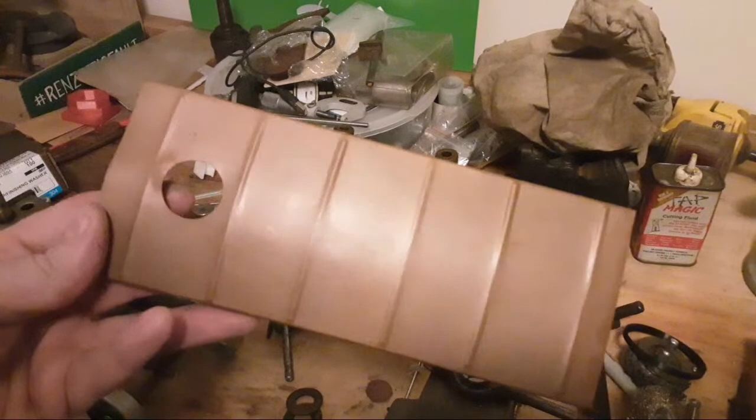But there's my canopy. These spiral pieces come off.

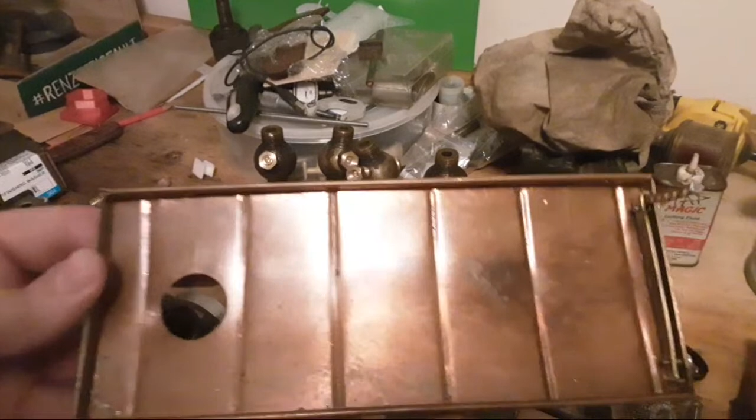It was actually, I quite enjoyed this. I think it come up all right.

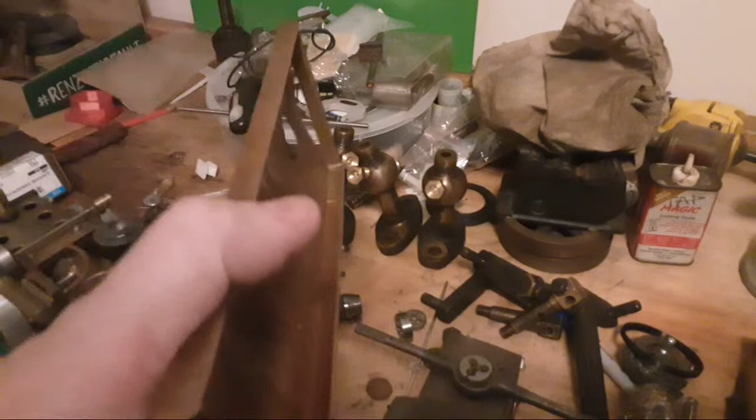I've just got to solder these back on here. It's got little pivoting bushes, and these are supposed to go in there, and they were soldered in pretty substantially, but they've come out. So whether I make new ones of these and new bushes and silver solder them together so it doesn't happen again, or what I do, I don't know.

It's got proper spiral columns, see? But it had a bang and they're a bit bent. But anyway, that's one of those jobs that I've got to do - get to that one day when I've got spare time.

It's something that's well proportioned. It's a pretty tidy little engine. It runs nice, straight out of the box.

It's got a burner. But without a whole lot of effort, you end up with a bit of time and a lot of new skills. You end up with a pretty nice little engine, properly finished.

Some small precision drills that were obviously odd sizes, probably for gas jets, something Dad had, I reckon. Don't know what's there.

Anyway, I'll put them away.

Dan's just been on the phone about the traction engine. Don't do that - I was going to ring, but then my audio book sounded better and I was dog tired and grumpy when I left work, so I didn't ring Dan.

I'm sure the information will wait. There's plenty of them around if you want one.

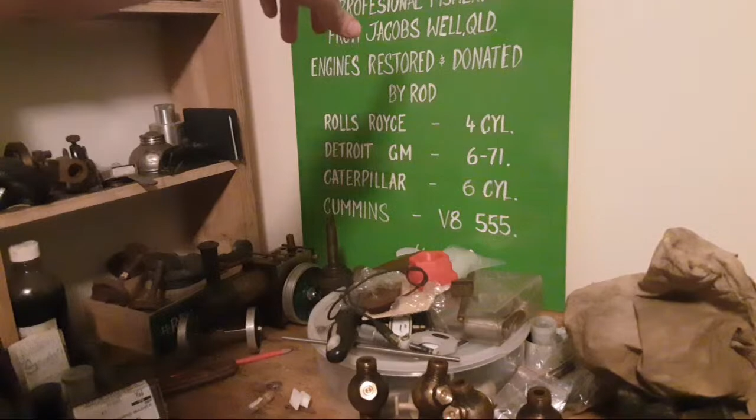I overshot the top of the E here. When you point them out, it's really not terrible, but there's a couple of things that aren't quite right. I've put the angle on that M there wrong.

And I'm gonna probably go over it all again anyway because it's a bit thin, so we'll probably fix most of that. Anyway, job's done. It's another job.

What I am buying is a drum of WD-40 or diesel or something and a squirty bottle, because I think that might be the way forward, apparently. No engines for me, I've got this nightmare. It's enough engines for me in my lifetime.

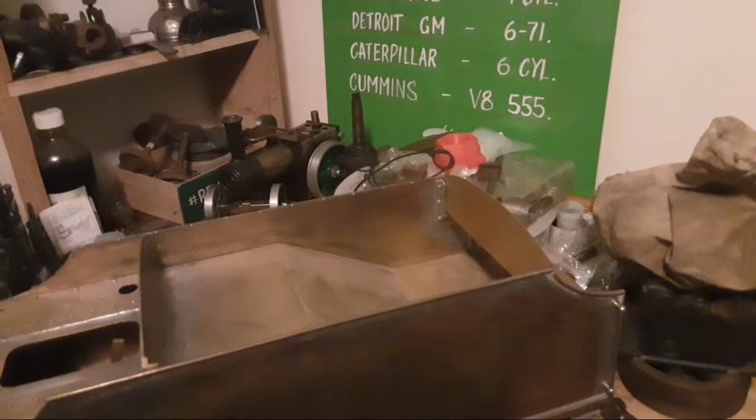I don't know how much you can actually see here. We'll try, we'll attempt. Here, I'm going to go hands-free.

But give you some idea, we were talking about this - this is for Don's Step-by-Step Metalwork 3, Ross, that's exactly right, and it builds that little engine over there in the corner.

David is the number one authority on that particular engine. But that's a pretty tidy little engine.

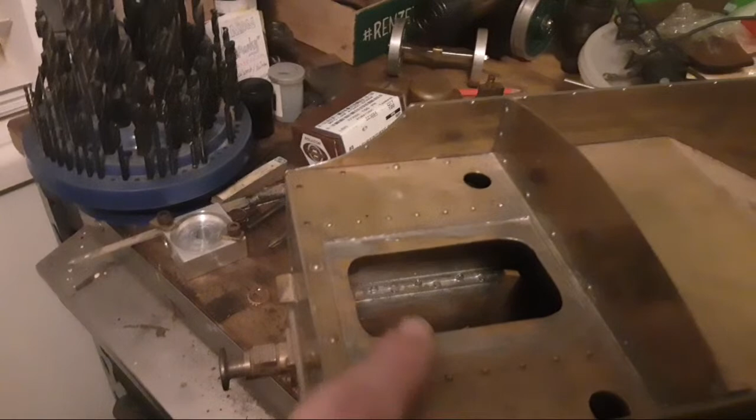So what we did was put angle all the way around - you can see that probably. We need a torch. Like that, all the way around. And then all the way around here too.

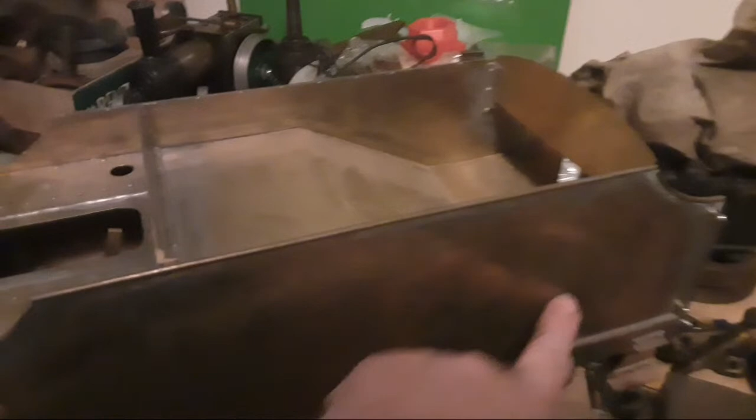These are actually rivets, I think - this was actually riveted on here. But this has got screws all the way around here too, and there's angle actually on here, follows this pattern, this shape here, to hold it together, and then there's an edge around here, which was a fun job. That's actually riveted on too, it's got rivets in the back, but a bit of work. This is just screwed in here. So that's the best way to construct a tender.

We'll have a bit of a look underneath and see what's involved. The tender's from my 3.5 inch gauge Princess Marina, which is another project that should have been finished and never has been.

Capillary action on the solder, yeah, just a soft brush and a big soldering iron and plenty of 50-50 or 60-40 or something. Ross, get in touch with me about that.

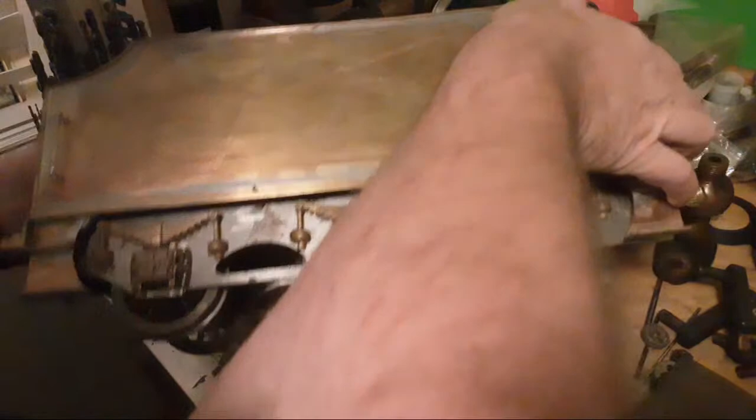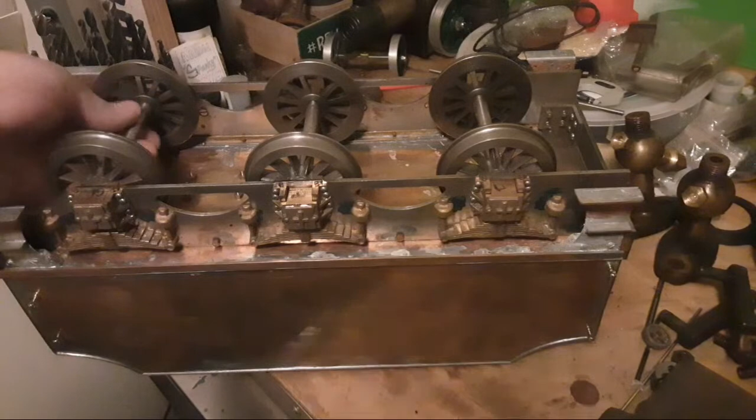So, I'll give you some idea what's involved with this. We've got very weak springs in it that need stronger springs actually.

Don't know what's happened here. Something got pinched or caught or something. There we go. There's a sort of spring loaded thing. Something's not quite right there. I think it's a spring caught on both of those.

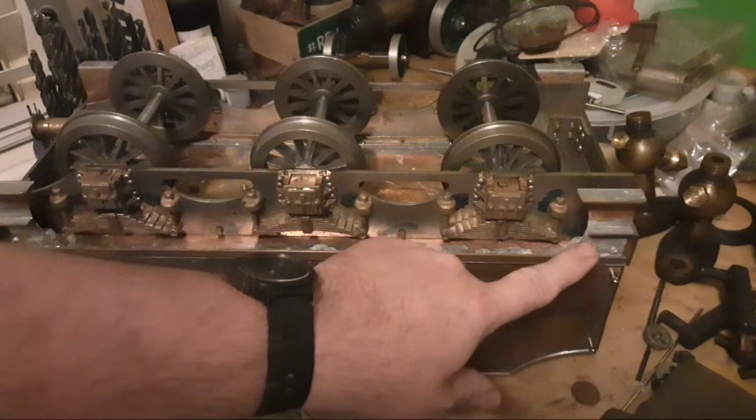This was actually a bad idea, putting these steps on here like this, and I'm probably going to cut them off and redo them and put them actually on the horn plates. But these were laser cut with all the shapes in them, and then these castings here go on there, and then the axle boxes and the two little horn stays each side.

So basically the wheels are just pressed on the axle. Quartering anything's not important. They're just castings on here. They've got coil springs in here, the springs. Hey, Kevin. And then the buffers are all.

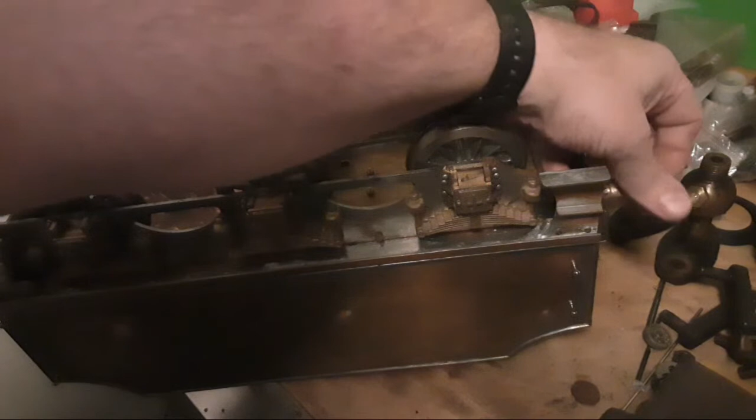It's a big job, this, but the buffers are all sprung as well. I don't think these have actually been properly assembled yet. I don't think these were strong enough springs either.

So there's a lot of work in that. I don't know why this has gotten tight, but I think this one's not. This one is. I think the springs probably jumped out of the keeper there because they weren't the right springs.

Might be a little bit of rust there, but I don't think so. Probably it needs some oil. That's about the long and the short of it.

This is the same. It's got two steel, like two aluminium, two angle rails here to hold this on there. So these are screwed or bolted through from here in a couple of 4 places.

Then here on the back, or on the front here, they've got pieces of angle here, and this fits in between them, and they've just got bolts in them. These are actually riveted on the front. And then there's bolts for the buffers.

So crap load of work in that, but you can put something like this together, if you get in and have a go. This took me about 4 months, I think, 3-4 months weekends.

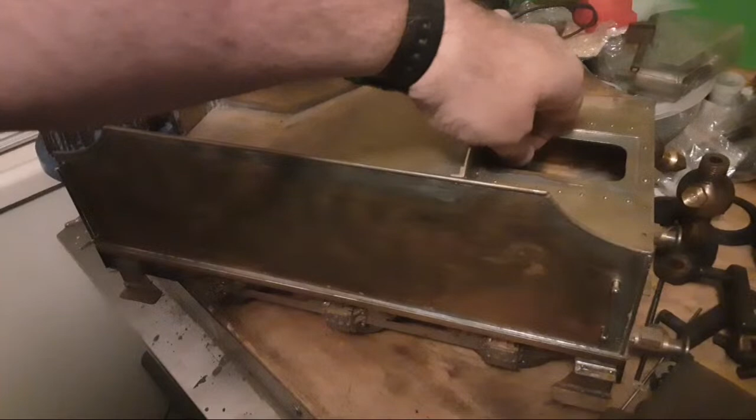There's a hand pump in here, a stainless plunger and everything. And I need to put a hinge on this, but that's basically a cover for that.

Kevin, g'day. We really are looking forward to your next video. Absolutely. If you're anything like me, you've got nothing else to do.

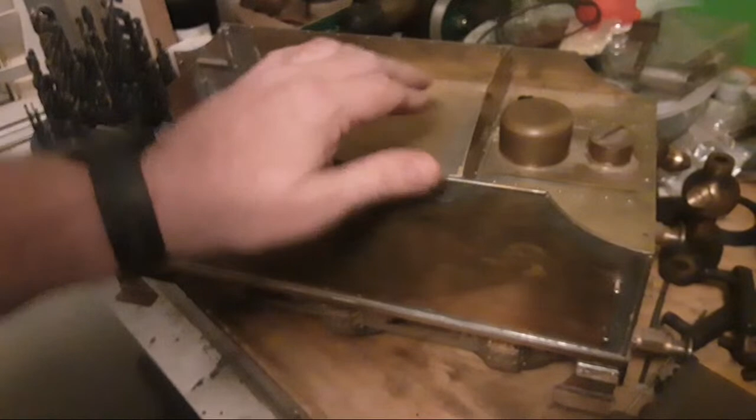So, anyway, this is something that I'm still working on, which is sort of a dummy panel for display. I'm not sure it's entirely as awesome as I anticipated. I might have to rethink it.

But the idea is to have a dummy panel here and working doors and a toolbox and stuff on it, so that you can put it on for display or you can take it off to use it.

The boiler is what needs to be done, but the boiler is the expensive bit, so at some point maybe, when I sell the roller, or not.

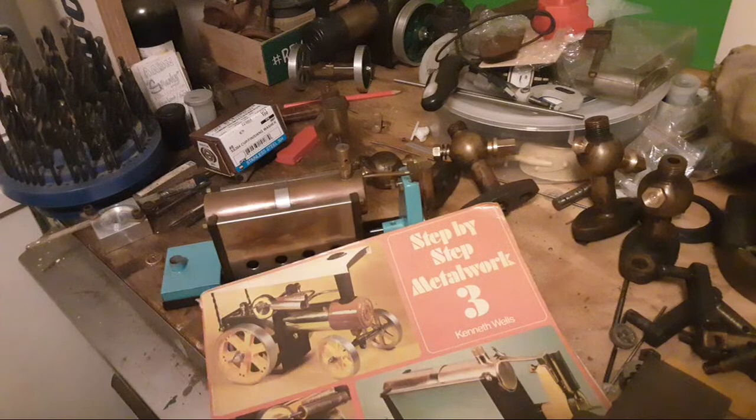Anyway, this is a pretty nice little book. It's still in print, or back in print. There was 3 of these books, this is the last one. It's a high school book. We had this in high school, and I never built either of these engines. I looked at the book and wished I had.

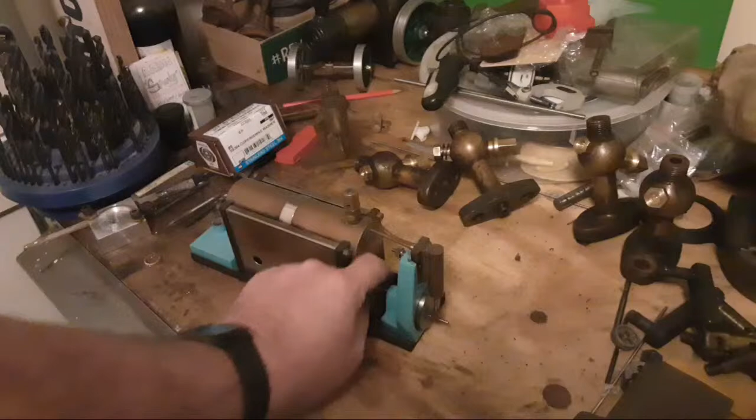But I built both these, right? This is the marine engine, which is a very pretty little engine and quite good. It's got a burner in the back and a little oscillating engine with a casting and everything, proper form sideboards with nice flange holes and folded up sheet metal and studs through here with nuts on each end and a piece of stainless across the top to hold the boiler in place, and proper pipe work, very presentable, like oil hole and a stripe on the flywheel. Very, very cool little engine.

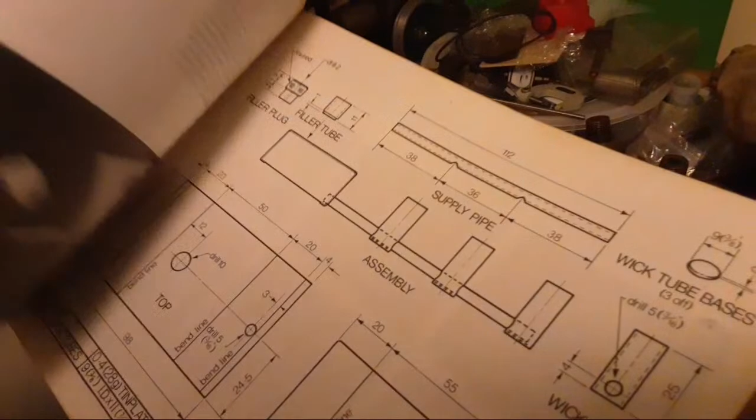This is a good book because it's basically step by step. It's got good drawings in metric and imperial - actually, mostly metric, sorry guys. It's got a picture of the burner and the base, that's it there, see? It's not a bad little engine.

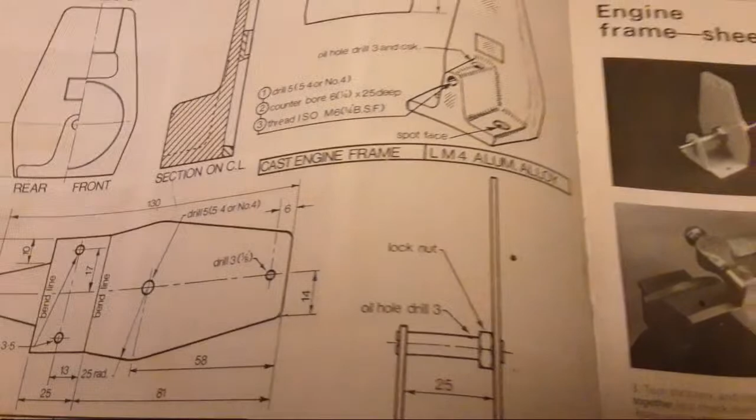The engine assembly is the same on both engines, and the boiler's pretty much basically the same too, but it's got options, like David says. So there's a casting, which I made a pattern for, and there's a sheet metal one, which is made up out of sheet with a bush in it, which is quite good too - so you don't need a casting for it. So that's made without a casting, but this one has got a casting, which I did.

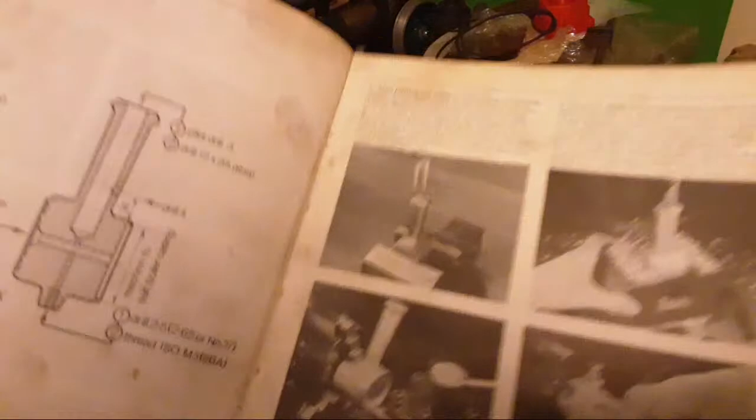Having said that, it's got basic foundry work too, step-by-step drawings, copes and drags, how to pour your castings and patterns, and make patterns and castings for this little traction engine, which is a very pretty little engine. It's quite a good runner. So basically it's wooden patterns through to completed engine.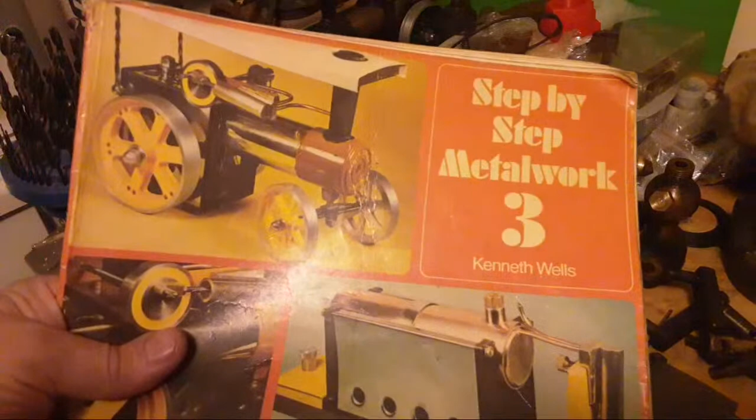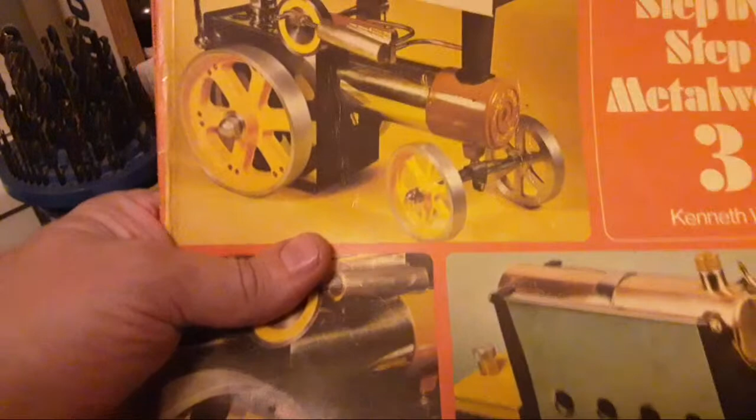Donald, yeah, do it because it's a really nice little engine. I've got a set of patterns, Donald. You're down the road, so I can get you a set of castings. No worries at all, but that is a pretty good start.

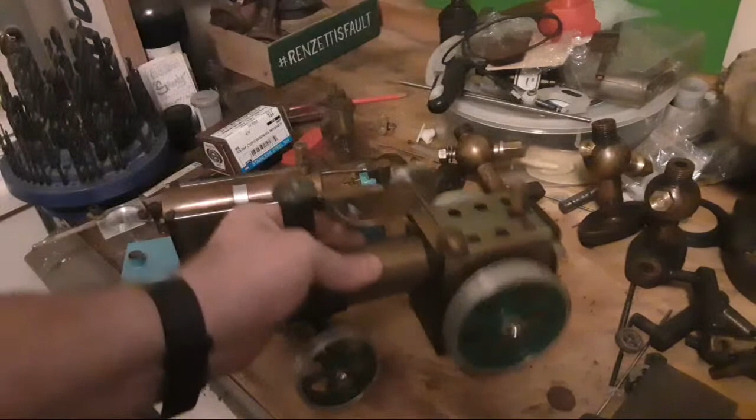It's a nice little engine. This runs like a dream. It's well finished - better finished than a Mamod or a Wilesco engine. It really is classic. And the traction engine's really not a terrible design either. It's seen a bit of use, you can see they could do with a polish, but this is a really good design.

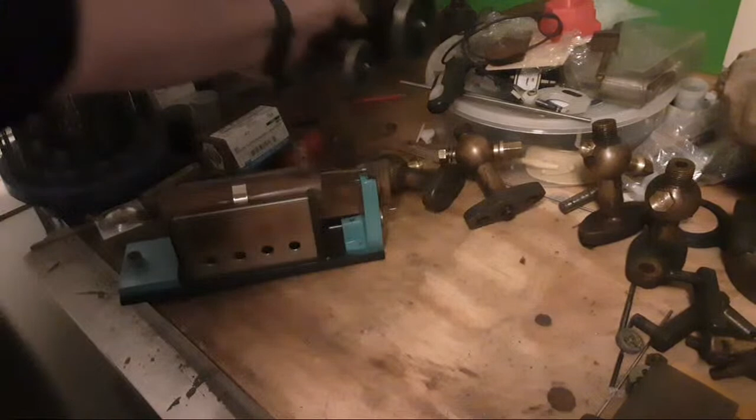The boys over on the Discord forum are building a poly. I'll grab that book too.

Also, there's no washer on that one. Someone said something about removing water from brass copper boilers, that's why. There was some discussion on Discord, on my Discord server, about steel boilers being a bit more difficult to manage and maintain. But you can't really leave water in or dampness in a copper boiler either, because this is what you get, and you end up with scale. But that's beside the point.

These are Titch, like LBSC pattern safety valves from the Titch book, which is a proper Ross Pop style pop ball safety valve, which is fantastic. Probably could come apart in the clean too, but anyway, you could go in ultrasonic maybe.

Steel and copper boilers are really the same maintenance. You've still got to spend some time on it. But a steel boiler in another 30 years is going to be a lot easier to put new tubes in than a copper one.

But someone said they thought a boiler only lasted 30 years. That's not quite right. The boiler on the roller was rebuilt in '97, so was this 25, 28 years ago or something? It's still got a full boiler's ticket, and I think there's still at least that long or a bit longer on it before it needs to be downgraded.

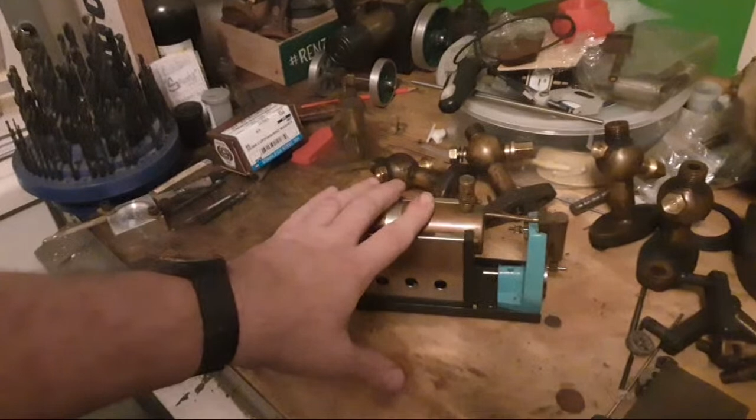But if you've got that crap in there and you put hot water in it and boil this off, right, all that crap's going to boil off. And then you get non-dissolvable solids in your water. And what you get is air bubbles when the pressure comes up and the oxygen rises to the surface of the water.

Where with a clean boiler and clean water, the bubbles come to the top and then they pop. So you've got a very small or fairly thin foam layer, like a kettle boiling or something like that.

Take care. Say hello to the ferret.

So what you get with a dirty kettle, you don't get the same result. What happens is when that boils up, the bubbles in the foam at the top, when the oxygen comes up through, because there's a layer of non-dissolvable solids on top, those bubbles don't pop.

You just get more and more foam. So what you end up with is a much more difficult to determine water level on a gauge glass, and you get less steam space at the top. So when you do open the throttle, it takes a lot less to withdraw the steam completely, so your pressure doesn't last as long.

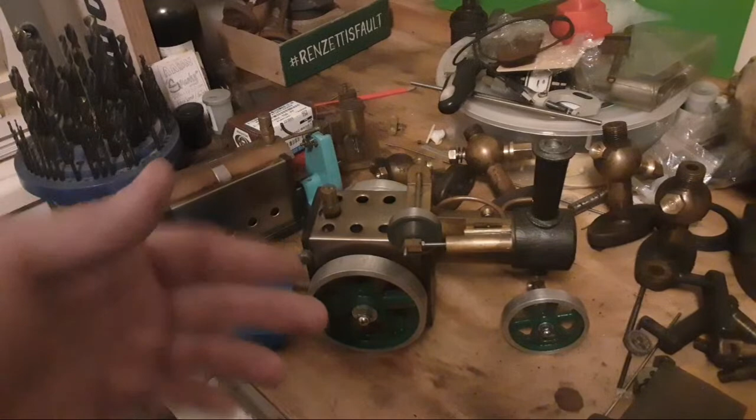Anyway, there we go. There's boiler school for the night.

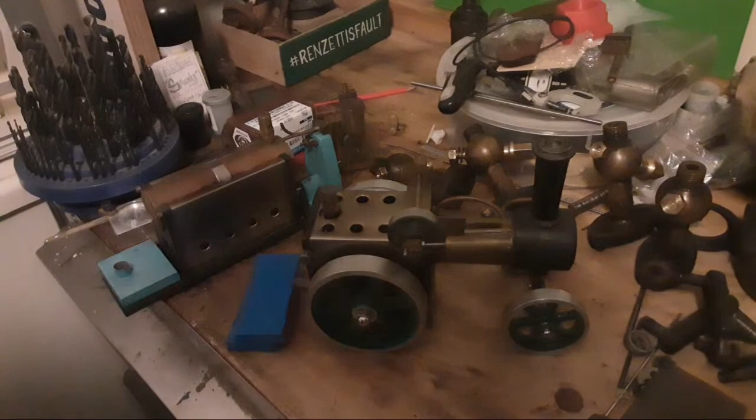I know lots more than that, but I'd have to look it up. Ask Dan, just Dan Shed on if you're on Discord, on the Discord server. Dan Shed, just tag him, he'll answer your questions. He's an expert, it's what he does for a living. I'm not. But I guess I can drive a roller around a bit, that's about all I know, and that's very, very limited. And I've sat the course on all this, but I've retained some of it.

So that's how it works.

But there's more to driving a traction engine than just driving it. The other thing about a full-size traction engine is that they don't have brakes. Which is a bit of an issue.

We could demonstrate with this one because this one hasn't got brakes either. But once it starts to move, it don't stop moving. Basically, you crawl it downhill and then throw it into reverse, and it will, to a certain extent, if you've got enough steam pressure, stop it.

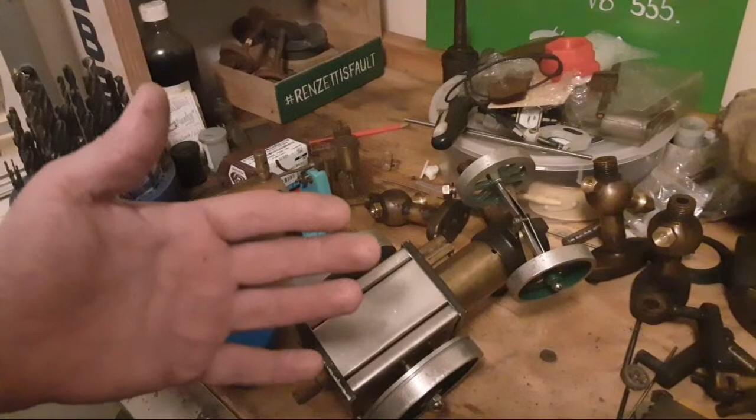You see how clean my hands are? I really like that, I'm not getting black at all. Anyway, if you look through historic traction engine photos, you see this regularly, and there's a couple in living memory that have had this happen to them in England. And you also, every now and again, see one with the front end through a wall somewhere.

It's because when they get away and you get going pretty quick and then you hit a bump with one side here and break the steering chain, this swings around sideways and you end up off the side of an incline or in a ditch or upside down or something like that.

Driving a roller is a bit of an experience, to be honest. Generally when you take it out, something that you haven't foreseen, or something that shouldn't go wrong, will go wrong, and you've got to be on top of that, and that's a bit more difficult.

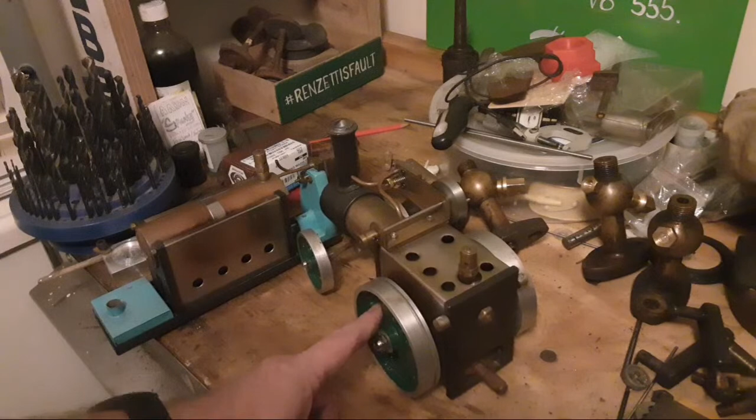Last week we went out, had a good day winching logs out of the bush. There's videos on Facebook and Discord, just short ones, winching saw logs out of the bush with the winch on the left-hand side wheel. What happens with the roller is you pull the pin out, and then the winch is driven separately to the wheel, so the wheel doesn't move, and the winch turns on the axle. So if you undo the end of the winch rope, which is attached basically to the drum, it just keeps turning, and reverse the engine, you can pull the rope out, and then pull a log with it or whatever, which is very useful. It's very, very powerful too.

But towards the end of the day, when we were starting to remove logs around the paddock, the rope came past and caught on the injector pipe here and bent it and broke it. So we had no injector, so time to go home. Little jobs like that happen all the time, every single time you take it out.

Expect the unexpected with them, because it's going to happen, and you've got to be sitting on a fairly big kettle with a lot of pressure in it. So there's a lot to learn, and I'm still learning, very much so. But that's what steam's all about - I think you're always learning.